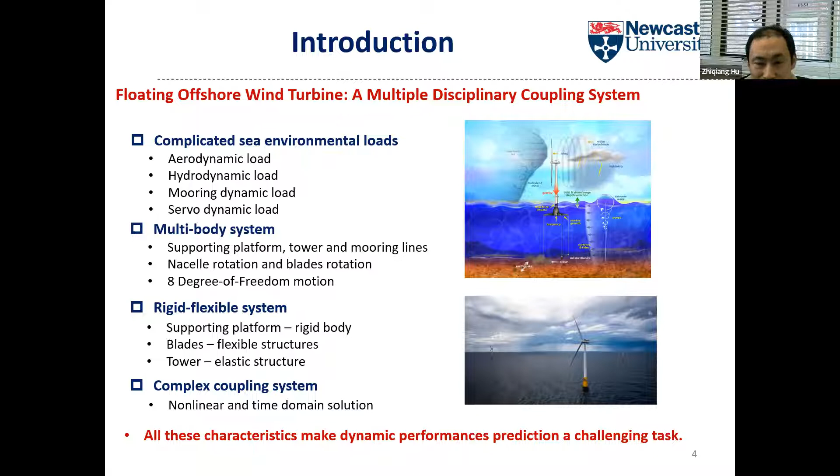Nowadays, people use 3 different types of methods to calculate the dynamic performance of the floating wind turbine. The first one is the numerical method. I think that's a theoretical numerical method based on the fundamental theories. Here I gave an example: in my team we built an in-house program. It's called DARwind. It is built based on some theoretical analysis theories and can be used to do the analysis and prediction for the floating wind turbine.

But this kind of method has some problems. For example, lack of full-scale data for validation, because the wind industry is very confidential. They keep most of the data confidential, so it's quite difficult to do the validation work nowadays. So we can't say that the software calculation is 100% accurate, and it still needs more validation.

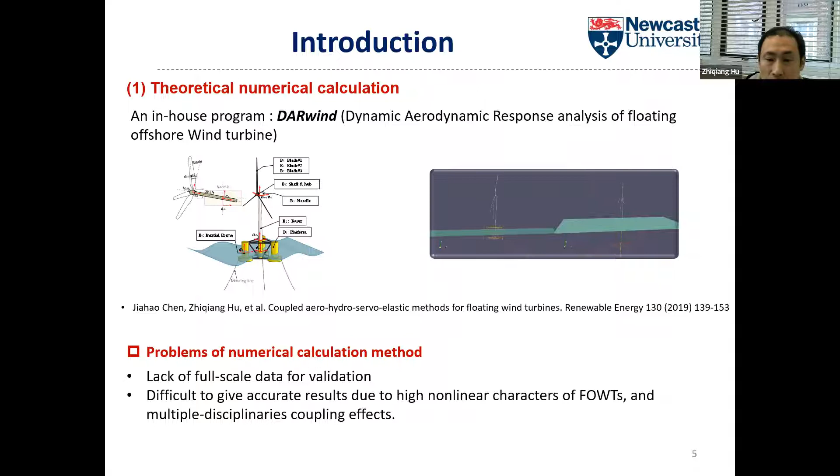The second method is the basin experiment method. This is very popularly used in the traditional offshore engineering field. But for floating wind turbines, there come, I think, quite many challenges. I give some examples here, but I want to emphasize the first one: it's difficult to consider the Reynolds number and Froude number simultaneously in the test.

So this means that if we conform to the fundamental theories, we cannot consider the aerodynamics and the hydrodynamics at the same time. So this gave a big challenge for the basin experiments academic field. So people have to find some new method to overcome this challenge.

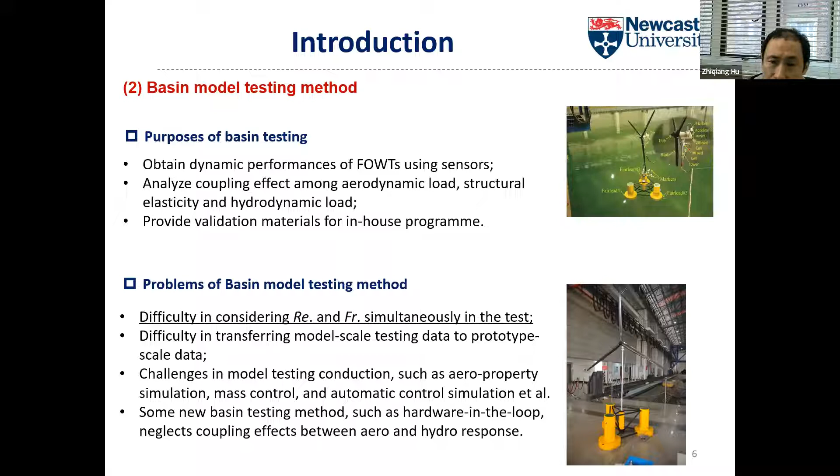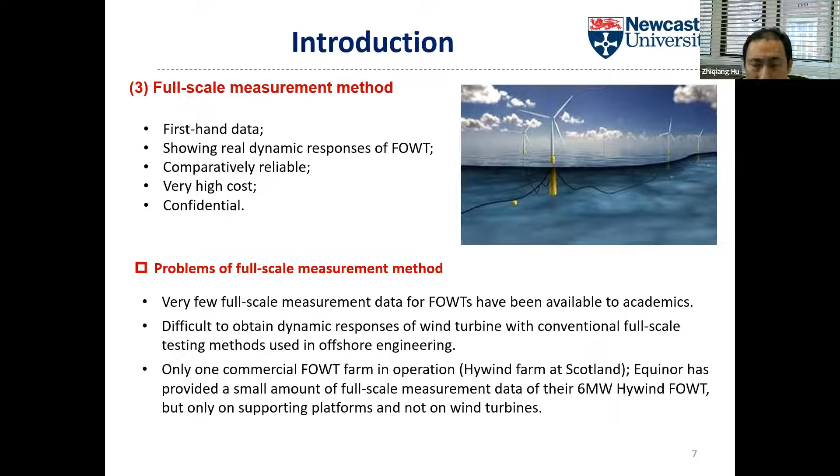The third method probably used is a full-scale measurement method. That means that if we can use Hywind in Scotland to directly collect the data, that could be much better. However, as I said, all these data are confidential, and whether the data are reliable or not is also a problem, and the cost is very high. So currently, we have a limited amount of full-scale measurement data, but I hope that in the future more data will be shared with the academic field.

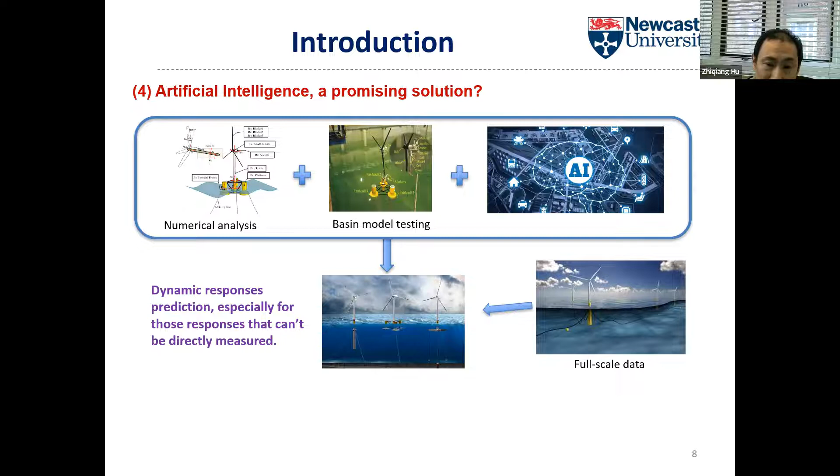So based on these 3 types of methods I introduced, people are thinking: can we use artificial intelligence technology? That's a promising solution. That means we combine the traditional numerical method, the basin experiments, and AI technology with the full-scale data to provide a more promising solution to overcome those challenges. And we find, I think, a better solution to perform the dynamic performance prediction for floating wind turbines.

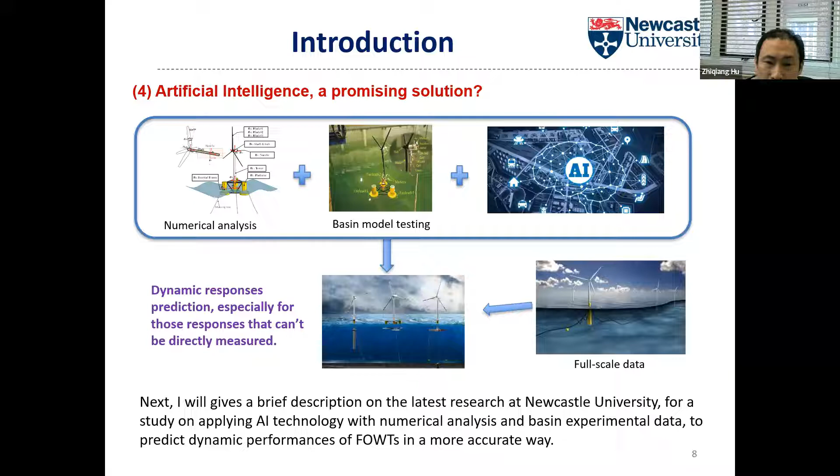Then we introduce the SADA method. This method is a new concept. Its full name is Software-in-the-Loop Combined Artificial Intelligence Method for Dynamic Response Analysis of the Floating Wind Turbines. It can be extended to other engineering fields, but in the floating wind turbine field, I introduce some of the important contents. First is DARwind. That means it's a foundation. This is software that the user must know very well, and it requires that the user understands the fundamental theories of the floating wind turbine. So this is the first key point.

The second one is the purpose of the KDP parameters, the key disciplinary parameters. These parameters play an important role between the AI technology and the traditional software. Their role is like a bridge to input those neurons from the artificial intelligence into the theories, and after the AI training, to help the software become smarter and become an expert for the objective floating wind turbine. So this is the second key issue.

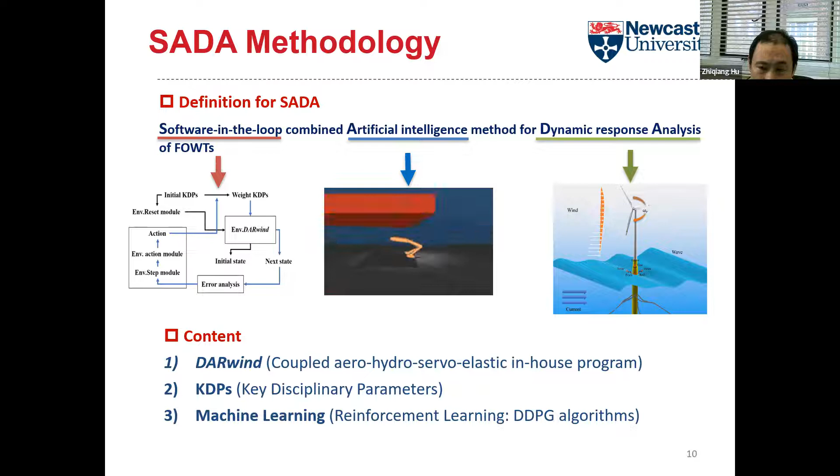So, for the first issue, let's say an in-house program. I mean that if you want to use the SADA method to do the analysis, the user must have a full understanding of the floating wind turbine and also have software. I don't think a commercial one is proper; the best solution is one that is built by the user, because they know the program very well.

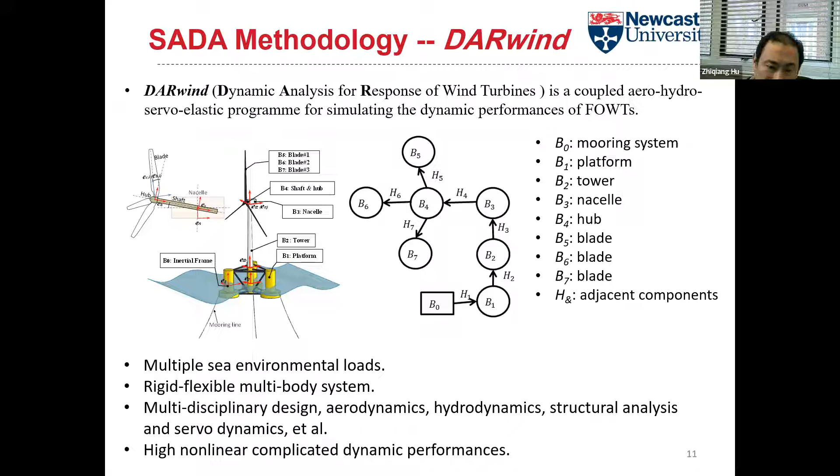And the second is the KDP selection. I want to say more about this. This requires the user to understand the floating wind turbine, to know how to calculate the aerodynamic load, the hydrodynamic load, servo load, all these loads. Then they will know which parameters are most sensitive, most important, and easiest to be the input of the neurons from the AI. So this means that the AI's role is not to replace the theoretical program, but to help or train the theoretical program to be intelligent, to be smart. So this is the AI's role in the SADA method.

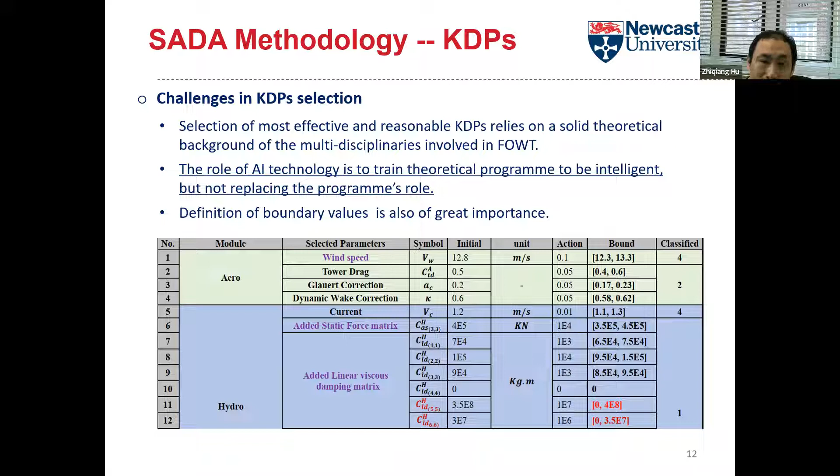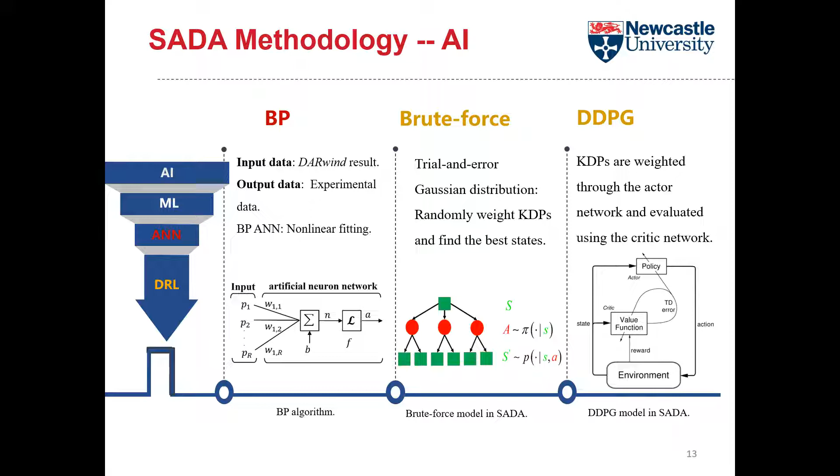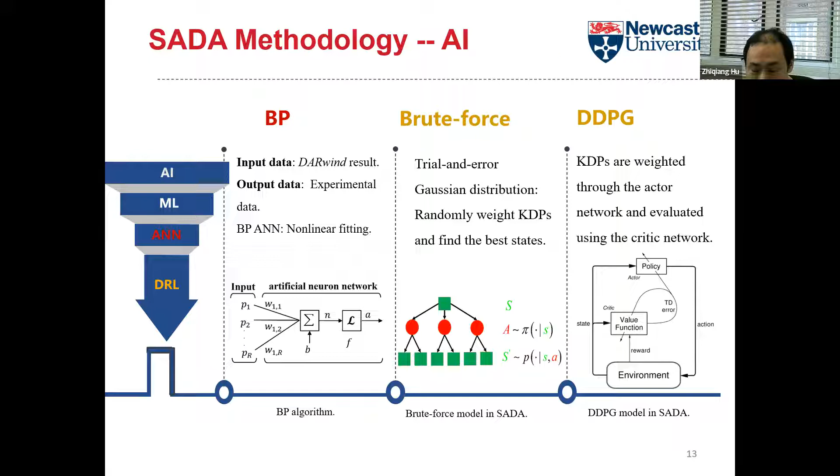The third issue is about AI itself. But personally, I don't think it's very crucial, because AI methods are published and updated every day. So the user can choose the best one, the most feasible one they want to use. In my program, we chose DDPG. I think now it's an older one, published two years ago. So the program and the concepts can be updated every day.

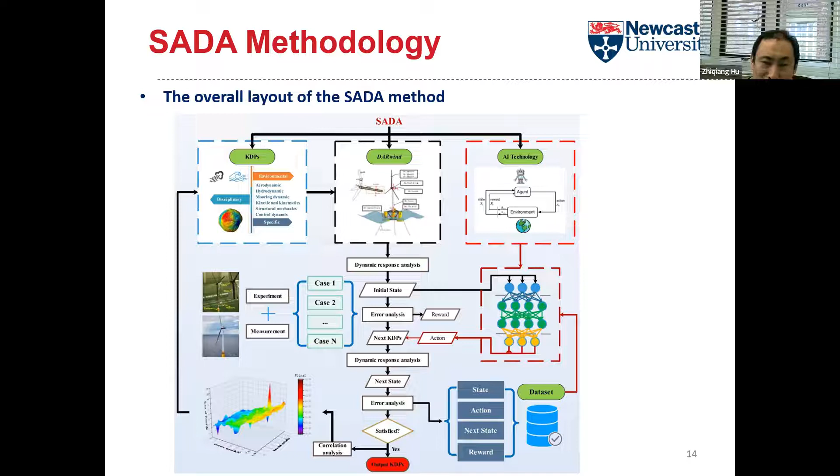This slide shows the fundamental structure of SADA. You can see the DARwind program is the core part, with the data from basic experiments or full-scale experiments as a source for the AI training, and on the right side, AI technology. The AI technology is the method that uses those data to train the theoretical program until finally it becomes smart and intelligent for the reference floating wind turbine. Then this method can be used to do further analysis.

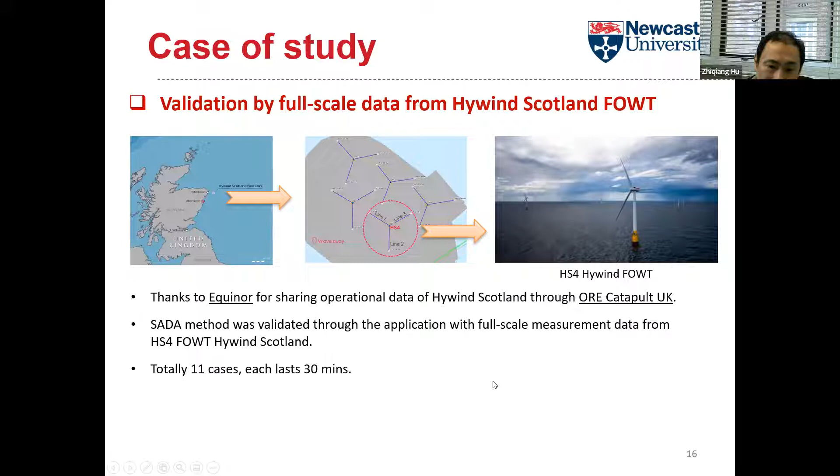Next, I want to give a short case study. I use Hywind Scotland. In this offshore wind farm there are in total five floating wind turbines, and we received data from HS4, one of the floating wind turbines. Equinor owns the support and mooring system. They kindly shared some of the data with Catapult, and a few years ago we collaborated with Catapult and obtained 11 cases of data, each lasting 30 minutes. So we used these data to validate the SADA method.

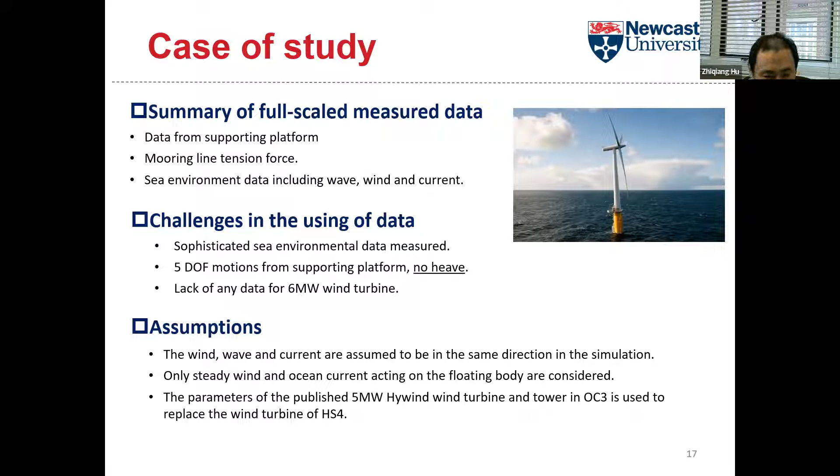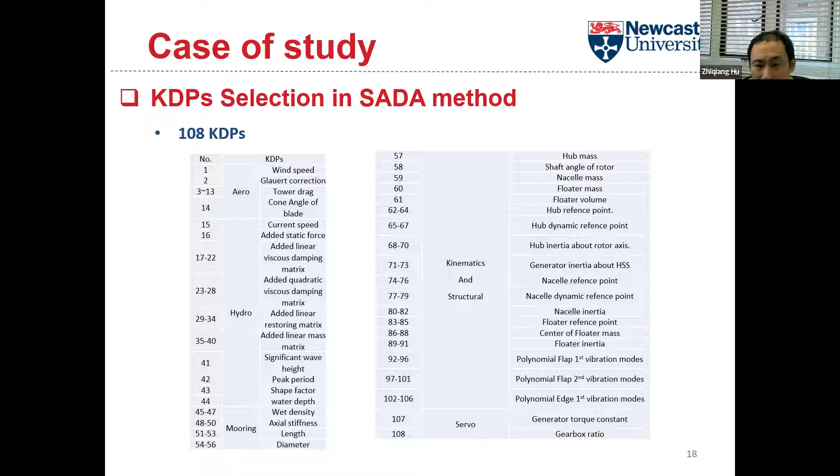When we use this data, there are still some challenges. For example, the full-scale measurement data is not complete, meaning that there's no heave motion. Some of the motions we don't have, and we don't have the data for the wind turbine. So we have to use the published 5 megawatt wind turbine to replace the real wind turbine. So this is also a challenge for us, whether we can use SADA, use AI, to do the approximate analysis. In this case, we chose 108 KDPs. It is quite important to choose these KDPs and to complete all the training and the evaluation process.

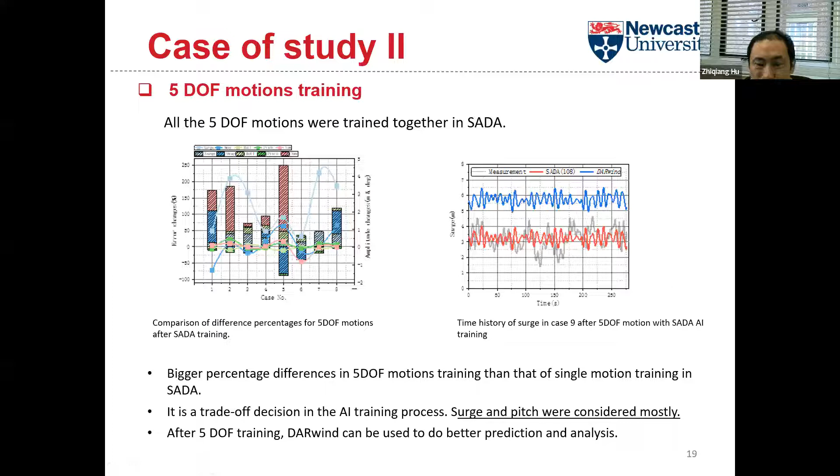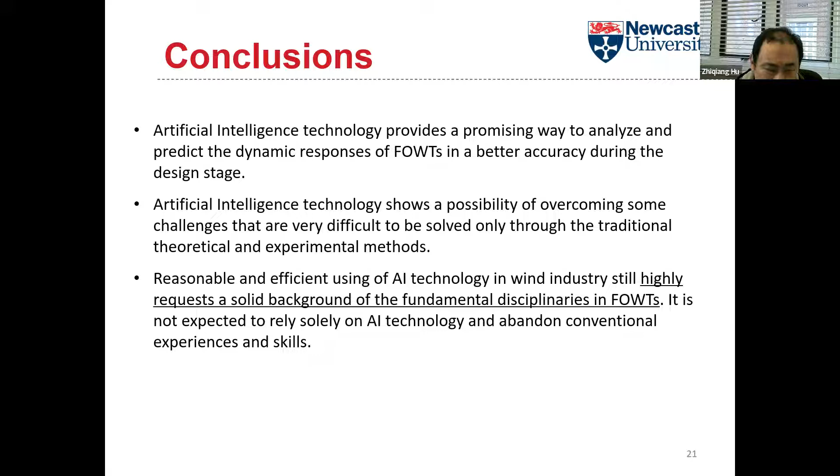Finally, conclusions. AI technology provides a promising way to analyze and predict the dynamic responses of floating wind turbines in a better way during the design stage. But we must say that using AI technology still requires the user to have a solid background in the fundamental disciplines of floating wind turbines. It's not expected to rely solely on AI technology and abandon conventional theory and skills. So we must build a better solution based on existing experience and AI technology together.

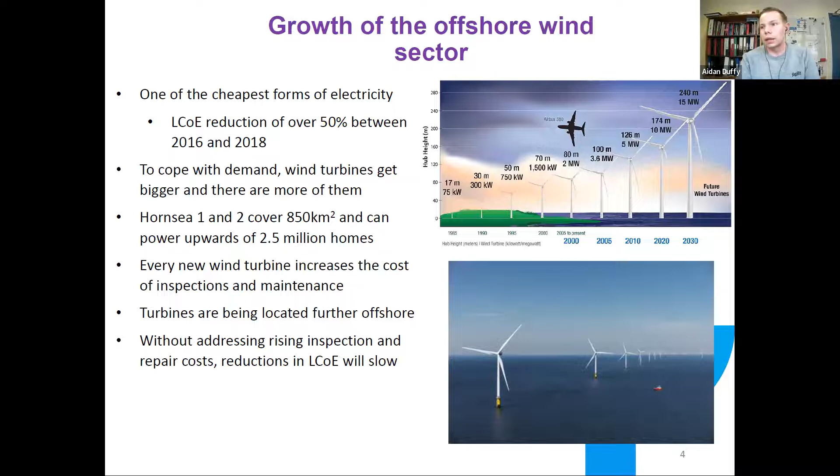Some of that is down to leading edge erosion. What I'm looking at specifically is rain erosion: rain droplets impact the blade, and the kinetic energy starts to cause damage within the blade materials and coating, which gradually wears away and leaves a non-smooth surface. That affects the aerodynamics of the blade and reduces the lift, meaning less power is produced by the blades as they rotate, so less electricity is produced and they become less profitable over time.

Because offshore wind is a relatively new thing, there's less understanding of some of these processes, and to start with, less appreciation of how large an effect these things would have. So there's a drive now to have that understanding in order to improve things like repair timing and inspection timing, to reduce maintenance costs and therefore improve profitability.

Obviously this is something which is getting a lot of traction. There's an International Energy Agency task assigned specifically to address leading edge erosion, developed in 2021, so again quite recent. It's looking at addressing some of the challenges of modelling erosion and the effects it has. Some of the things I've done in my project are directly aligned with the work packages within there, so what I'm doing is highly related to what's being designed within the industry at the moment.

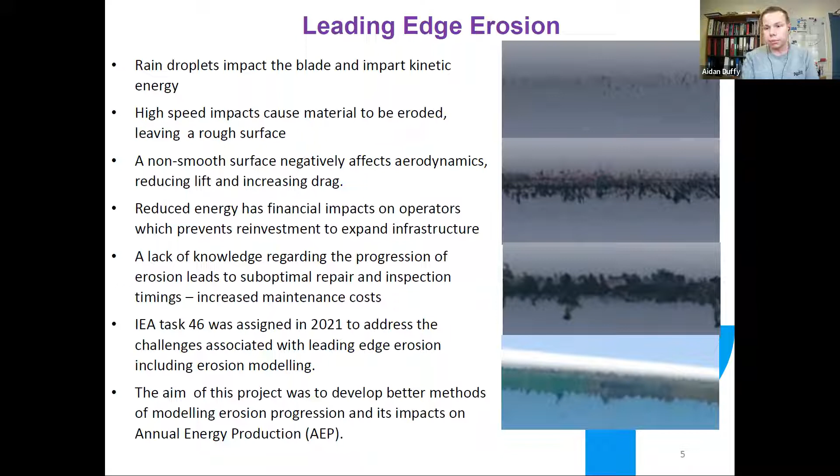Okay, so before I go through the rest of it, I want to sort of express the range of things that the PhD process can entail, and the range of different techniques which have been integrated and used, and the fact that it's a very diverse and open process that you can get into and make your own, and do the things which suit you best as a researcher.

So I'll go through some of the different steps I've done, and they include doing 2D CFD, or computational fluid dynamics, and annual energy production analysis methods. So they enable analysis of aerofoils and assessment of lift and drag and energy, in order to view how much energy is being lost over a period of a year, for example, compared to an undamaged blade.

Now, there's a model which I developed, which is used to produce 3D eroded geometry, and that integrates new methods of assessing the area on the blade which is covered, and I'll return to this later on. But generally speaking, in research, a lot of that is over predicted because there's not much understanding of some of these processes. So I tried to integrate a new method there in order to make the results more representative of reality.

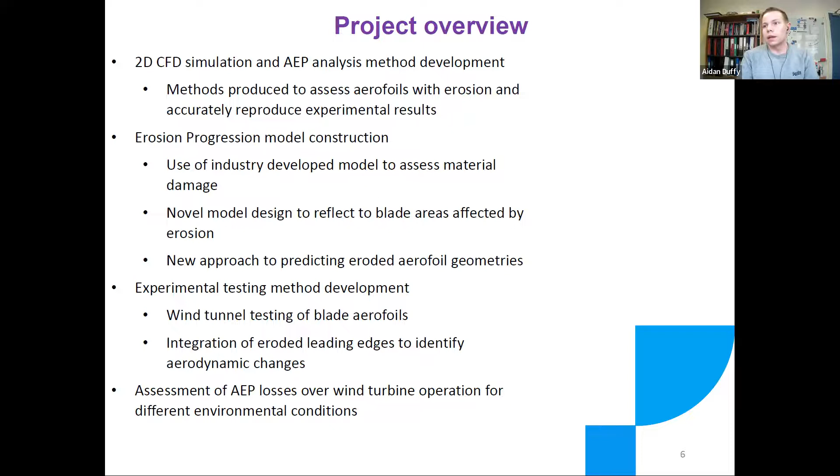Okay, so briefly, the first of these is the CFD and annual energy production methodology. So straight away, there was input from industry in this one. That was help in developing simulation models which are in line with industry standards to make them highly representative and useful. So I use parameters which come from rain erosion tests as inputs into the model here.

A rain erosion test is a form of accelerated testing where a model is put on a whirling arm rig which rotates at high speeds in a simulated rain field, used to assess material properties which will be used on wind turbine blades in the field. So I had data and parameters from that, which were input into the computational model, and that was used to get things such as the lift properties, which is the top right graph. So I've got coefficient of lift against the angle of attack up there.

And what you can see is that as the roughness gets larger, from this clean purple line, there's a gradual decrease in the lift; those properties over time become worse, which means you get less energy from the wind turbine. And then looking at something called bypass transition, which means that instead of naturally transitioning from laminar to turbulent along the blade, the airflow, when there's a certain roughness, can jump right to the location of the roughness, which is at the leading edge of the blade. So in this model here, it'll be right at the front. And that means there's a change in the lift and drag properties, which reduces the efficiency of the blade.

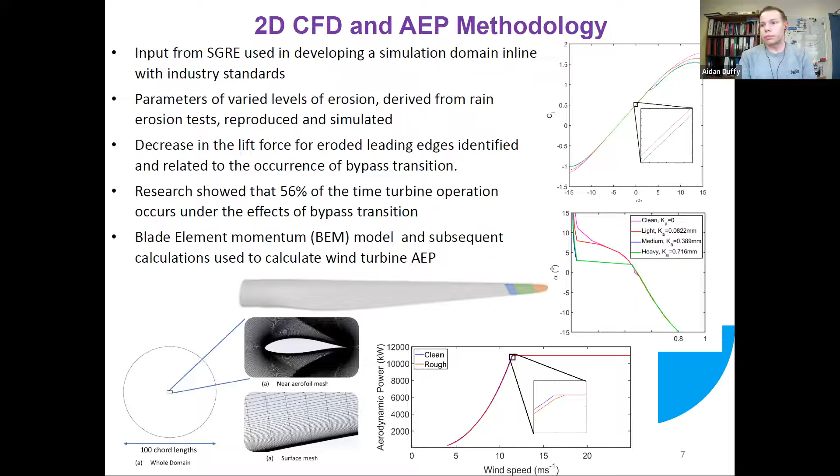The next part that I mentioned was this erosion model to produce a distributed 3D geometry of blade erosion. And this again started from industry input for a model to represent the damage caused to material by droplet impact. So it combines the droplet impact velocity and the rate of rainfall, which correlates to the size of the droplets and therefore their mass. And using material properties for the blade or blade coating, you can work out how quickly erosion occurs, and that gives you an indication of the time it takes for material loss to start and to develop after it's initiated.

Then in addition to this part, there's the coverage, which I mentioned, across the leading edge of erosion. Generally speaking, that's overestimated in studies because there's a lack of understanding of how that's done, and there's not really any analyses to represent that. But that's something that I integrated here. So I've made a novel approach to predicting the area susceptible to droplet impact.

This combines the operating angles of the blade, which are dependent on the wind speed. So with wind distribution over a period of a year or longer, you can see how the operating angle will vary, and therefore the time it spends operating at certain angles. And that's combined with impingement limits of droplets. The impingement limits effectively are if the angle between the incoming droplet and the blade surface is too low, the droplet will just deviate and it won't impact and impart any energy. So past a certain limit, there's no actual damage caused by the droplet.

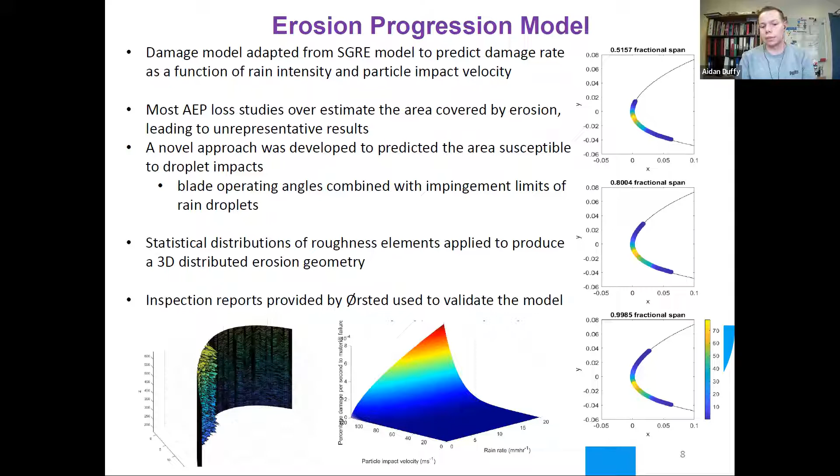The other part I had here, I'm trying to skip through some quickly, as I realise time is going on a little bit.

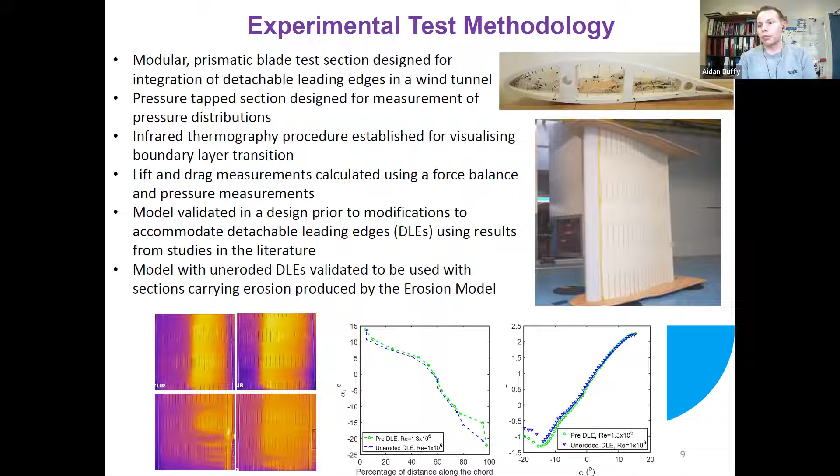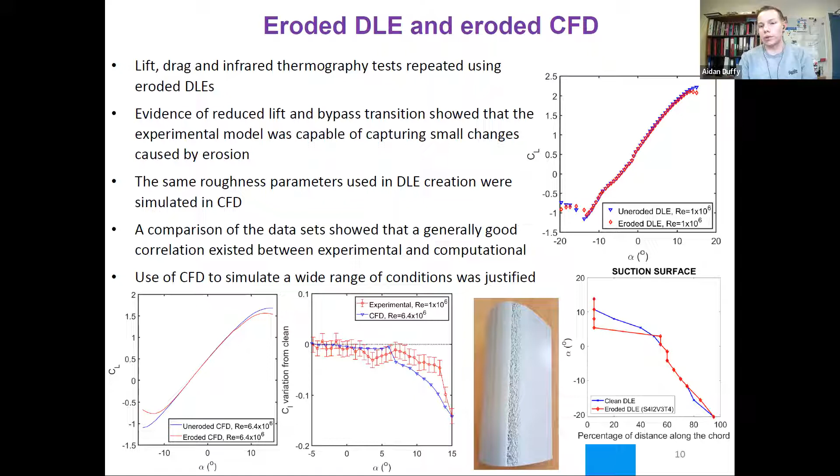And this is used to validate a model with detachable leading edges, which will then carry erosion, and also to validate that the technique was applicable, which is this part here. So I have an eroded leading edge, that's the picture, and did the same sort of test in the wind tunnel. Then these were applied to the CFD and the comparison made to show that, generally speaking, the CFD is representative of the experimental, and therefore I was able to use the CFD method in a wider range of studies to assess annual energy production losses over a larger range of operating conditions.

Each of these parameters has a specific associated damage rate, and it can be used as a lookup or reference tool to extrapolate to other conditions with similar damage rates without conducting further simulations, to get an idea of how the AEP will progress over time without having to spend resources on inspection and further simulations. You can still gain an understanding of how much energy, and therefore money, is lost, and perform a cost benefit analysis to determine when lost income exceeds repair costs, and therefore optimize the inspection times.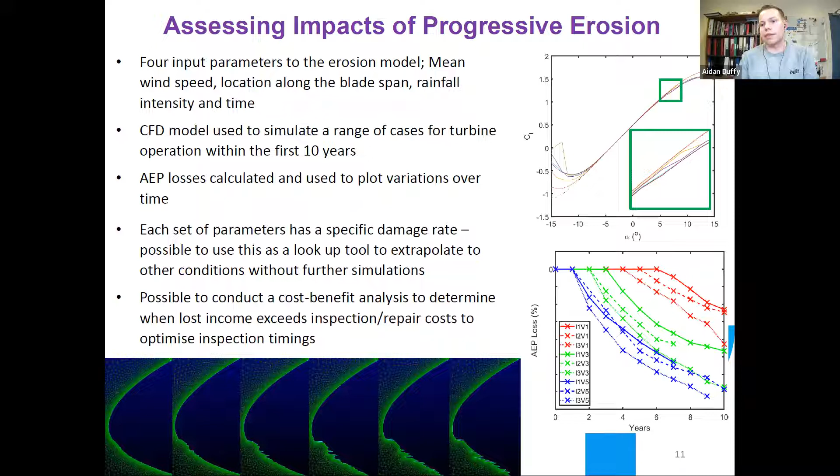So very briefly, the benefits of the PSG process for me. I've had a chance to work closely with people within industry and work towards industry requirements. I've been able to develop a range of transferable skills in a lot of areas, which open a lot of pathways into different industries and different future careers. I've become more visible both within industry and academia through doing things like presentations.

Specifically within industry, the last presentation I gave was to over 80 people within the company, including a number of managers. So the people within the company see the research overall, and I get more of a name for myself, I suppose, and am able to be seen more widely. And finally, I undertake work with the potential of real world impact. So it's something which is actually going to be useful in the world and hopefully gets utilised.

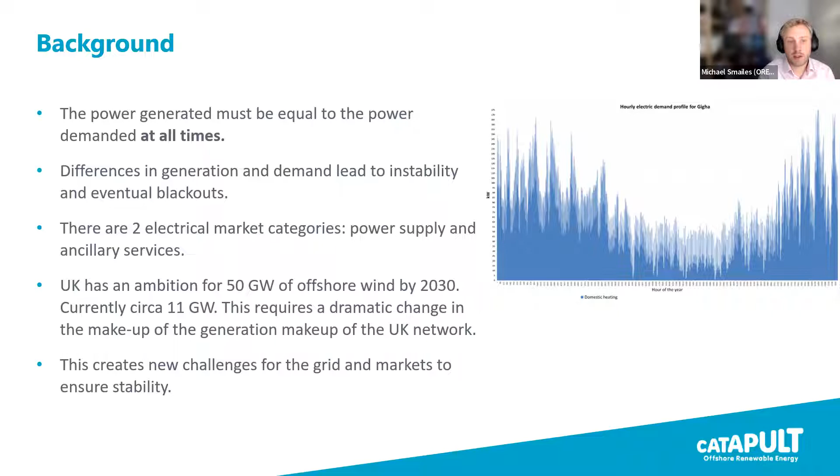As you're probably aware, the UK has a new ambition to build 50 gigawatts of offshore wind by 2030. To put that into perspective, over the last 20 or so years, we've managed to build 11 gigawatts of offshore wind. This is going to require dramatic change in the makeup of the generation that we have in the UK. And this will create some significant challenges for our grid operator moving forward. So a lot of the generators that they are used to, that they know, that they understand, will be taken offline in the very near future.

So our grid operator, National Grid ESO, has outlined 5 key challenges that they think we will be facing over the coming years. One is frequency and low inertia. So this means normally we have a lot of gas, nuclear, and coal power stations connected to the grid historically, but these are being taken offline. These traditional sources of energy had very large generators that spun at the same frequency as the electric grid. This means that if there was a mismatch in power, then the grid frequency took time to change. However, with all of these generators coming offline now, the grid frequency will change much faster, as wind turbines don't provide that same level of inertia as standard.

Stability: because of this lower inertia, the grid will become more inherently unstable. So any mismatches in power can lead to blackouts much faster. Voltage: again, the generators that we used to have consumed a lot of reactive power and helped balance the voltage on the grid. With all of these generators coming offline, this voltage balancing needs to be taken up by different sources.

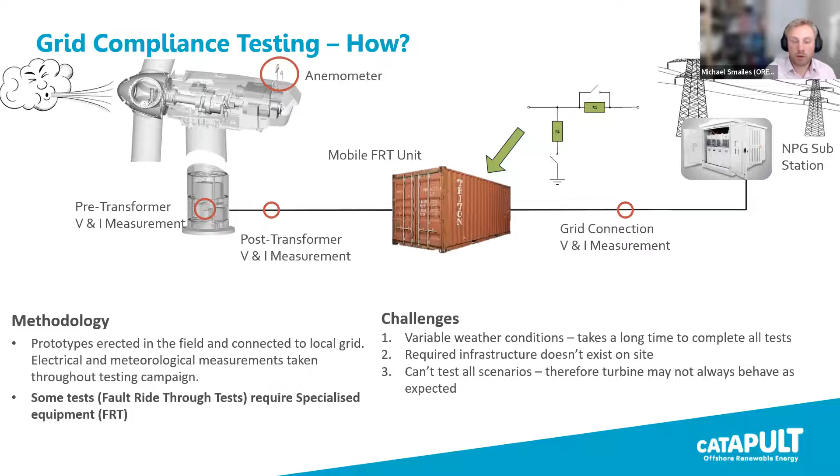The equipment at the moment doesn't exist for testing the largest scale wind turbines at the normal voltage, so 66,000 volts. And it's not just us saying this, National Grid has also recognized the problems. So these challenges delay turbines going out and potentially will result in turbines going out that aren't fully grid compliant.

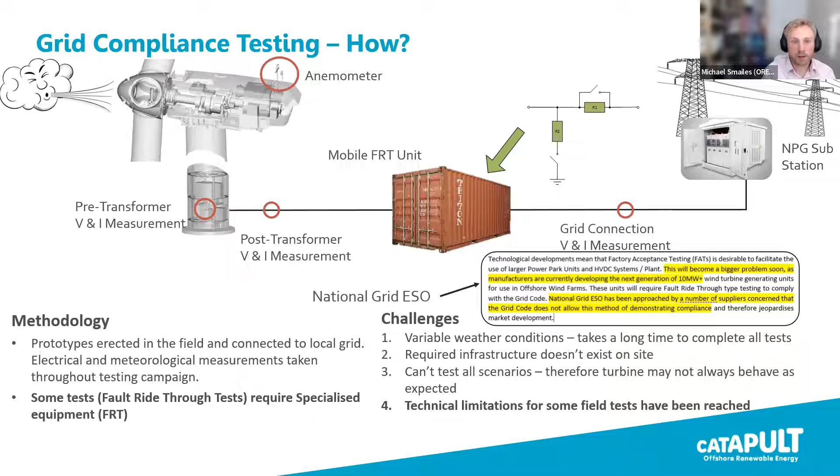So how can we address this? We can start to bring testing in-house where we have much more control over what's going on. There are a couple of places in the world where you can do this. ORE Catapult is one of them and is one of the largest test facilities in the world where this testing can occur. Other places include Fraunhofer in Germany, Clemson in the USA.

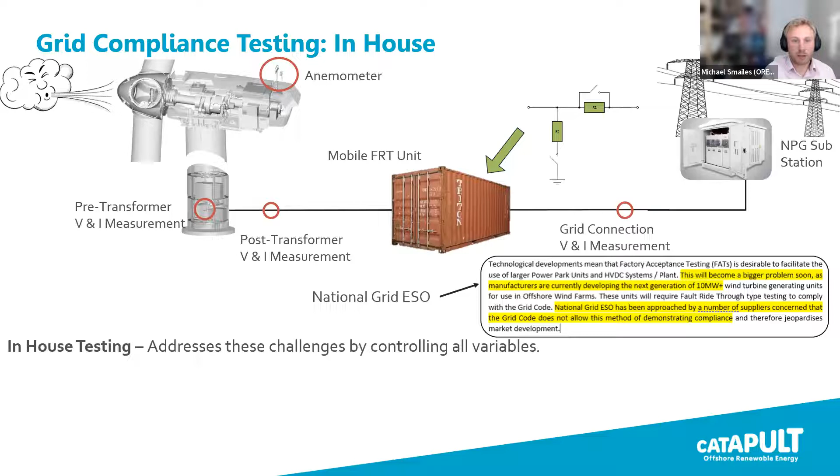So how do we do this? Well, first of all, we replace the wind with our 15 megawatt drivetrain test facility. This allows us to test full-scale wind turbines. And we replace the local grid with a grid emulator. This is essentially a set of back-to-back power converters that allows us to control the grid as the turbine sees it. Through doing this, we can create any of the grid tests that you saw on the previous slide.

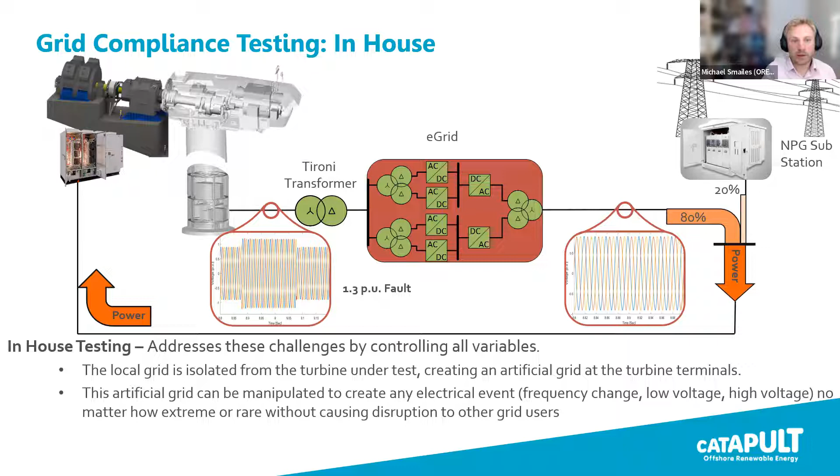So we can change the frequency if necessary. We can create fault ride-through events. We can create unbalanced fault ride-through events, even overvoltage events, all while not impacting our local grid. And this is similar for other facilities around the world. In doing this, we can make sure that we can test turbines much faster, much more reliably, and more realistically than connecting out in the field.

To take this even further, we can even do mechanical hardware in the loop testing. So this is where we can replace the action of the blades pitching and tilting. And we can do this by connecting to the wind turbine controller and putting the control actions through a hardware in the loop simulator, which then feeds into our mechanical drive system, so that if the pitch of the blades changes or the wind speed changes, they'll see a different torque and speed supplied by our mechanical generator, thereby ensuring that the turbine believes that it is changing the pitch angle of the blades.

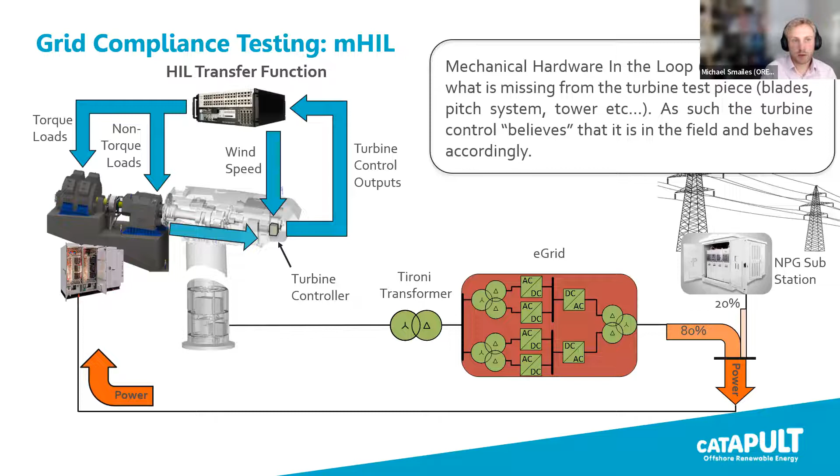So quickly in summary, what have I gone through today? Essentially, the UK and indeed the global electricity system is facing significant challenges to adjust to renewable energy coming online. The grid code is an important document that ensures all generators connecting to the electricity transmission system do so on a level playing field and ensures stability of the grid. The grid compliance is the process that all generators need to go through to demonstrate adherence to the grid code.

And lastly, field testing is becoming increasingly difficult, and therefore the future is moving towards in-house testing of full-scale turbines, as this allows more advanced testing and more reliable, faster testing as well. Okay, thank you.